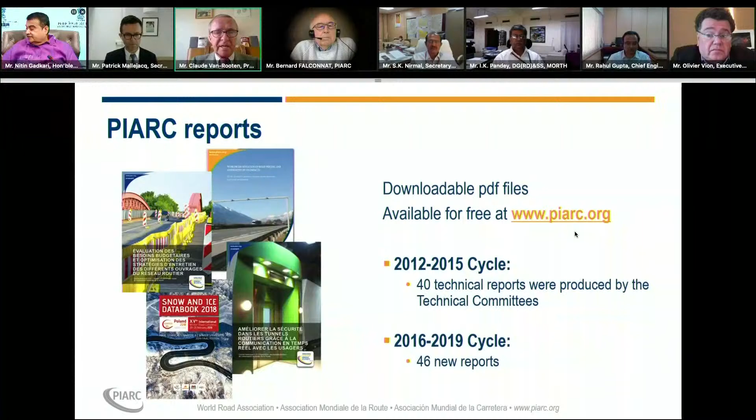It's important to exchange and present knowledge to countries who want more. That's why exchange of knowledge with and in low and middle income countries is quite important. We organized 22 seminars and 22 workshops in the former cycle. We have that all online on the website too. Now we have some difficulties organizing them all in person, but webinars are a fantastic solution to continue our knowledge exchange.

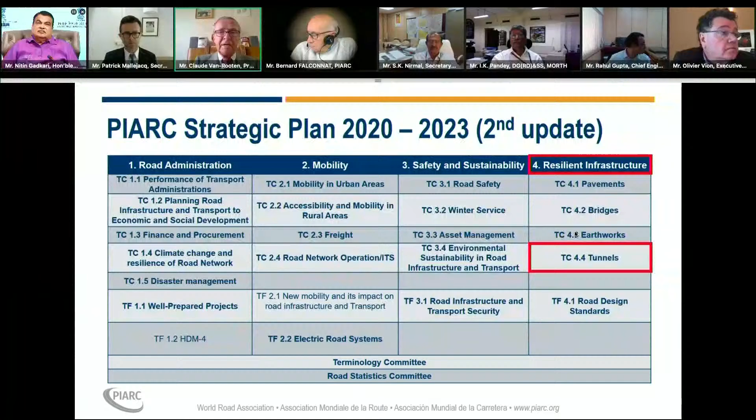We work based on a strategic plan after consultation of all our members and also partner organizations, because we try to have our work focused on the most important topics for the whole world. You see in the fourth column the topic of today: tunnels.

Within that strategic plan, we have horizontal issues: climate change, resilience, road safety, innovation, and since one year, of course, the pandemic. This is an issue where we have a response team quickly set up under the leadership of Patrick Mallejacq, working very hard on that.

Our work is led by Ingo Kaudinya about tunnel operation.

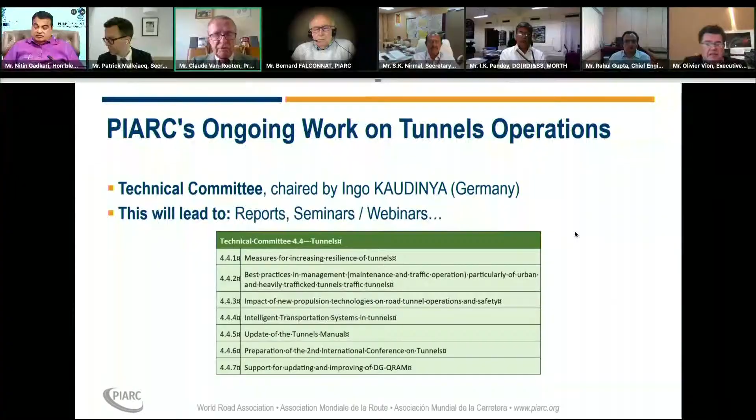Now I'm talking about the ongoing work on tunnel operations led by Ingo Kaudinya, who you are going to hear in the next sessions.

Tunnels: the technical committee has 130 members from 40 countries. Not every country is a specialist in all the technical committees we have set up. The work is organized in committee meetings and 7 working groups and task forces, and I would like to thank them all for their tremendous, continuous work on that.

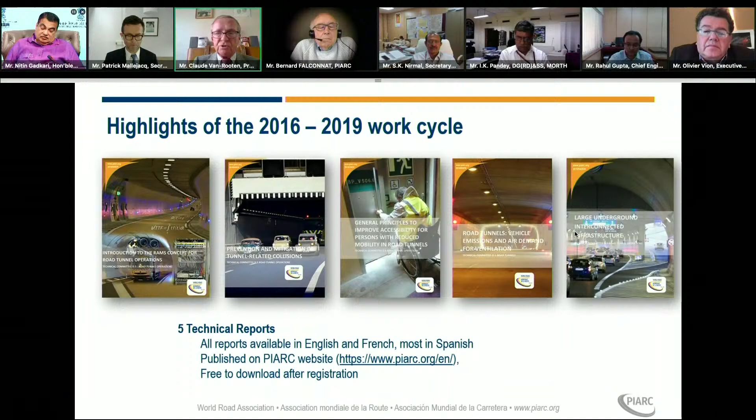Highlights of the last cycle. You can find all those reports again on our website, but it's important that you know it is almost continuous work.

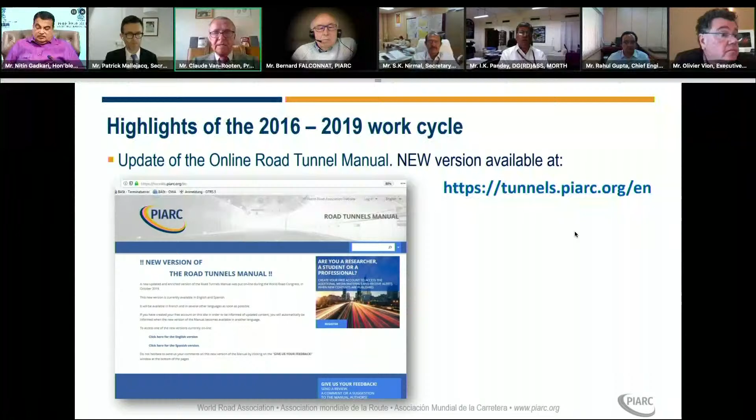Important also is the update on the online road tunnel manual. The new version is available on the website too. That online manual is a new method of presenting our work that is very accessible and helps you go at your own timing and speed to get all the information about what is happening in the whole world. I am being concise to respect the timing, of course.

We will have a second PIARC International Conference on Road, Tunnel, Operations and Safety in Granada in October 2022. And don't miss, of course, what we hope will be a real Congress in Prague in October 2023.

India was a founding member of PIARC in 1909. We have an esteemed member from India in our task forces on road design standards, and also on the Road Tunnels Committee. India is very welcome to appoint more experts in PIARC technical committees, to propose to host PIARC seminars locally, as you do now, and so on.

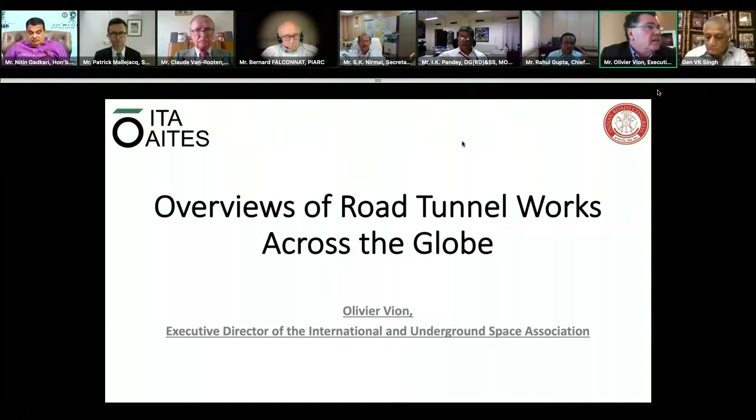The figures I will show you come from altogether 4,200 projects. Among them, 1,615 projects were in construction in 2019, and 2,600 projects were in planning or study phase. The global output for tunnel and underground space construction for the year 2019 was 125 billion euros, compared to 86 billion in 2016. That means growth of around 7 to 9% per year, which is twice more than global construction. So it's very important to show that tunneling is booming and that there are many projects all over the world.

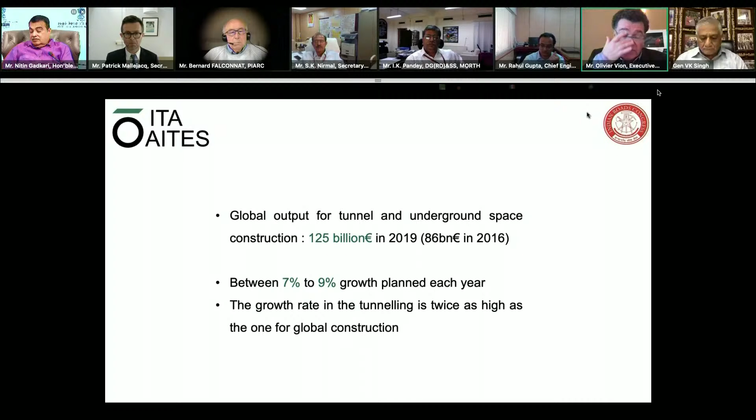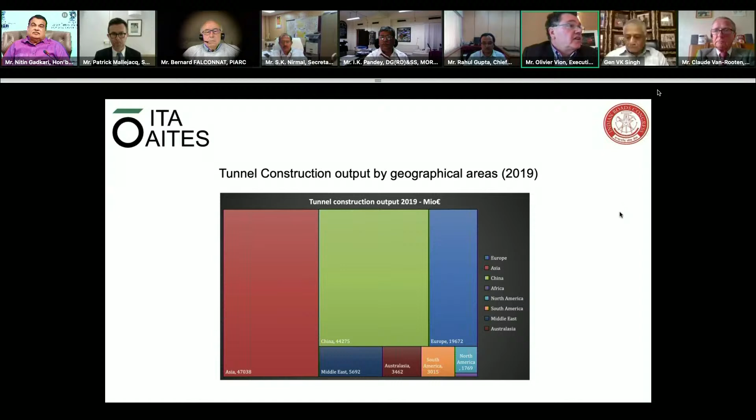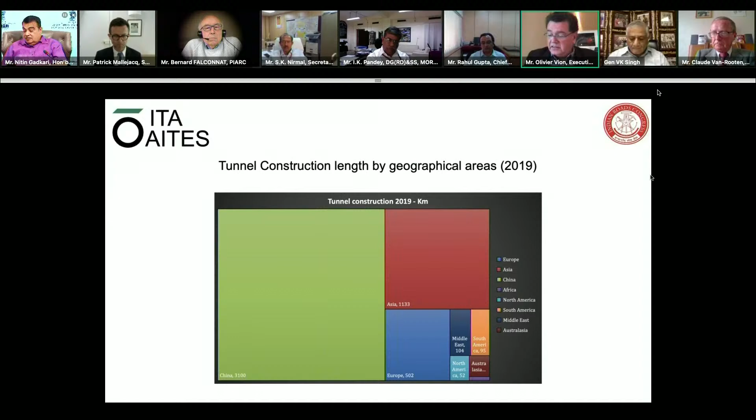Then in terms of kilometers, China is really the biggest. Of the 5,100 kilometers of tunnels that were in construction in 2019, 3,000 kilometers were being built in China, 1,000 in the rest of Asia, and 500 kilometers in Europe. This is very important to see.

In Europe, for instance, you have Turkey, which is now the biggest market in Europe, followed by some countries with the same amount of tunnels, around 40 to 50 kilometers excavated every year: Austria, Germany, Italy, Norway. Of course, the figures are different in kilometers versus output, because not all tunnels are the same value. Road tunnels are generally cheaper per kilometer than metro tunnels, and therefore countries building more road tunnels might be first in kilometers, but not first in output.

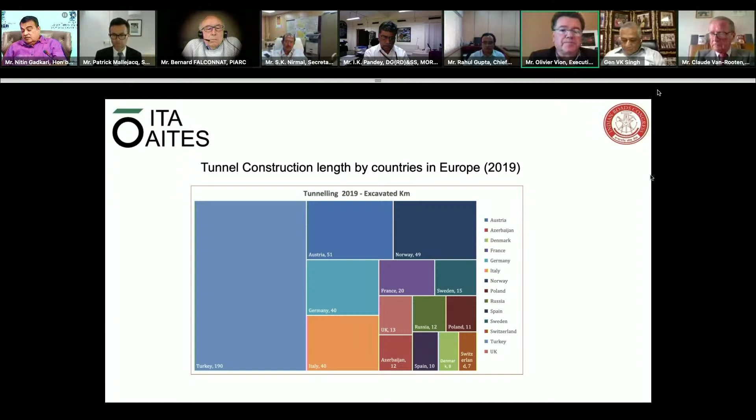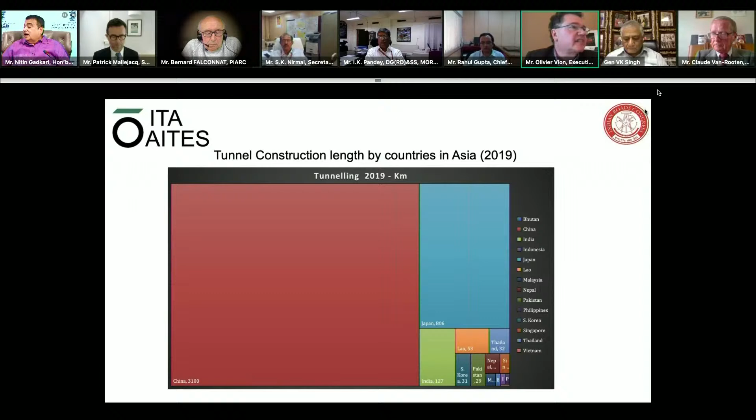If I take Asia, in kilometers you've got China with 3,000 kilometers of tunnels, Japan with 800 kilometers, India with 130 kilometers, and then other countries of Asia, in kilometers of tunnels excavated during the year 2019. As you see in the breakdown by use of tunnel, between metro, rail, road, and others, road tunnels are the majority of the tunnels being built in the world.

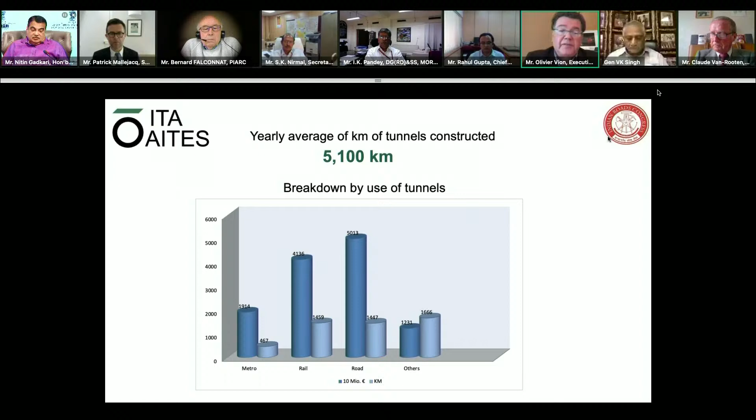If I go now more deeply on the road tunnels, taking the same thing: China, Asia, Europe are first, with 800 kilometers of road tunnel in China, 350 in Asia, and 225 in Europe.

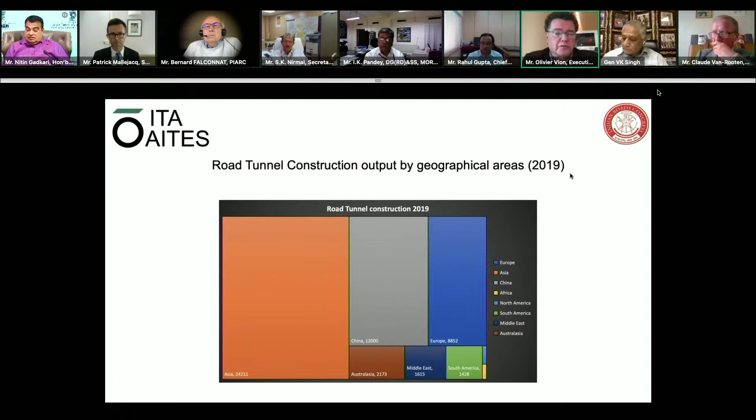And by output, Asia with 24 billion, then China, Europe, Australasia. So the global market of road tunnels, or all tunnels, is dominated by China and Asia, which are growing countries with the most people demographically, meaning the needs for tunnels and infrastructure are the most important here, and that's good. They need to build infrastructure, and among the infrastructure being built, tunnels represent a great majority of projects.

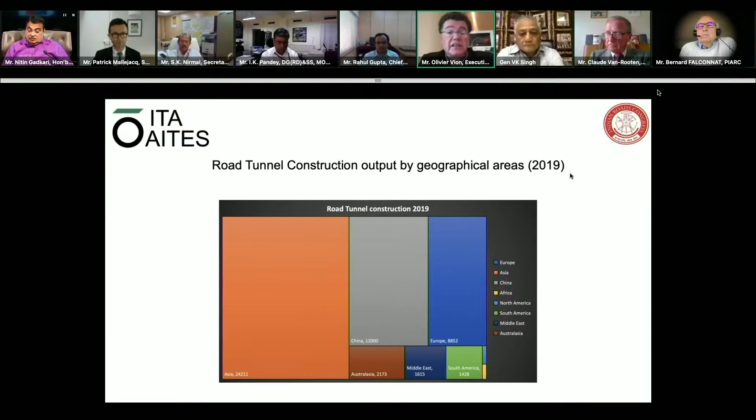That was a view of the reality of the year 2019.

If we look now at the projects, meaning tunnels in planning or study, it's more or less the same, even though the time frame between the start of planning a tunnel and its completion is much longer in Europe than in other countries, specifically China. Sometimes when you ask Chinese authorities about their plans, they can give you plans for the next 3 years, which already represents a big amount, but they do not have longer term plans.

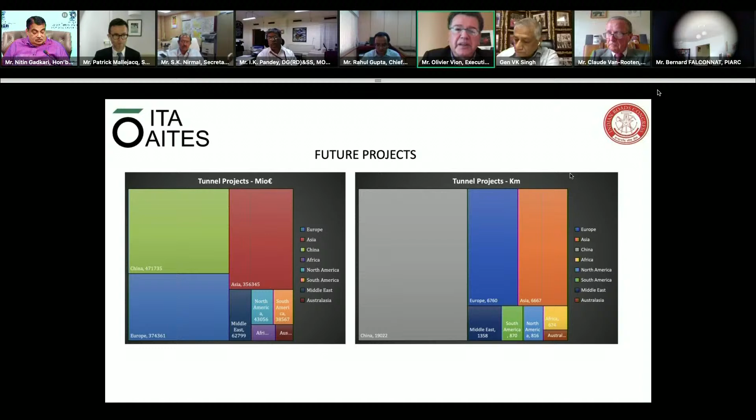For us in Europe, we have tunnels that have been in the planning phase for the last 25 years, and for which construction has not started yet. So we have many tunnels in planning, but that doesn't mean they will come in the next 5 years. In Asian countries, specifically China, when a tunnel is in the planning phase, it means that in the next 5 years it will be completed and commissioned. We would sometimes love to have this in Europe, but we have many other things to cope with, which unfortunately doesn't bring us to this figure.

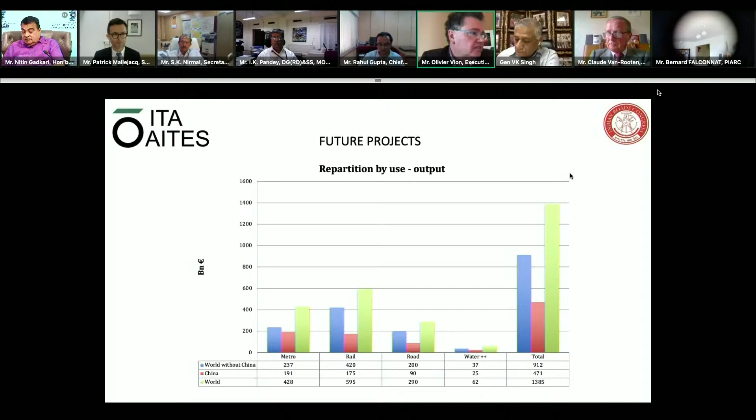I've tried to take some examples of road tunnel projects from the last years. The International Tunneling and Underground Space Association organizes awards every year for major projects and innovative projects - we'll start the 7th edition this year. I've picked some of the road tunnels that have been presented, either as winners or finalists of these awards, to show a variety of road tunnels being built around the world.

No, sorry, I already spoke about this. The first one is in Norway.

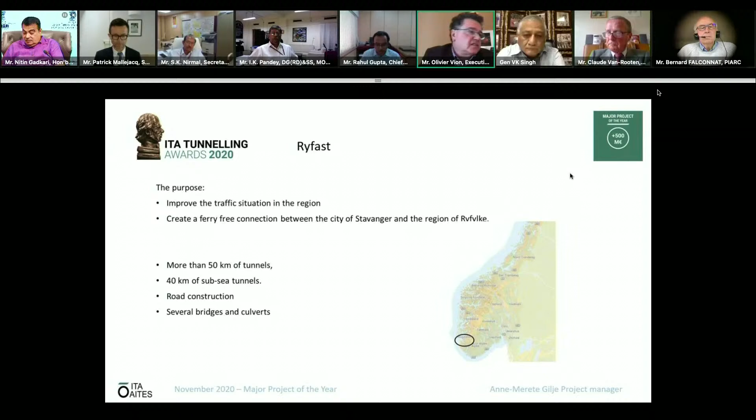As you know, the coast of Norway has a lot of fjords, but in the past you could only cross by ferry. They decided to build tunnels under the fjords, creating fixed links all along the coast. One of the big projects was the Ryfast tunnel, linking the city of Stavanger to the region of Ryfylke, with more than 50 kilometers of tunnels, including 40 kilometers of subsea tunnels.

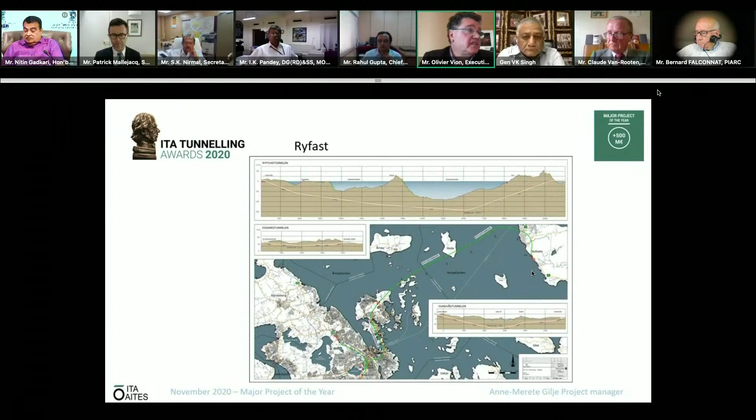It was built by drill and blast with probe drilling, and of course advanced drilling, because survey drillings made from boats, from the surface, are much more difficult to operate than when you're on land. So you need really advanced probe drilling and pre-grouting. Of course, you have something like 50-60 meters of water above, so you need to be sure you won't have leakage - otherwise it's very difficult to cope with.

Rock support with a geologist on site, shotcrete, bolts, reinforced ribs, fore-poling - all along 40 kilometers of tunnels. Quite an impressive tunnel in Norway.

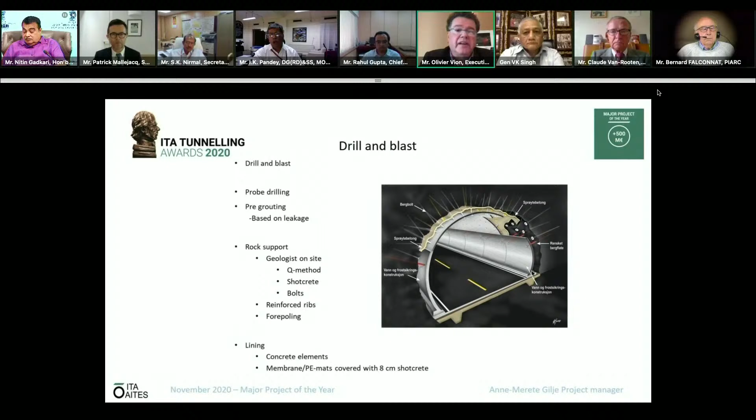Also in terms of operating the tunnel, to break the monotony, they made large caverns, sometimes bigger tunnels with changes of colors, so that people don't fall asleep when driving in a 40-kilometer long tunnel under the sea.

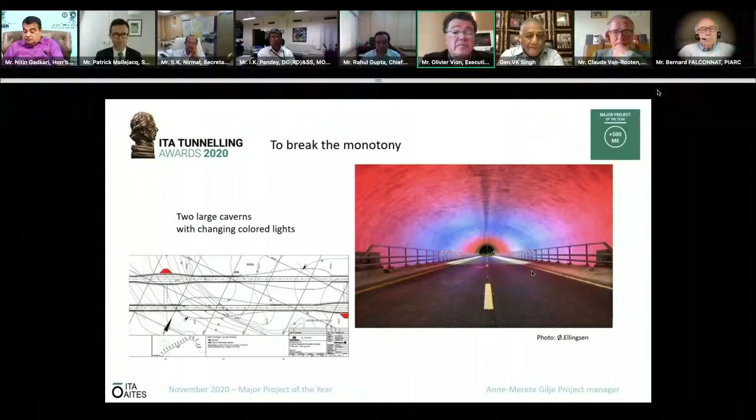So all the challenges along the way were, as I said, the weak zones, the low overburden, bad water leakage, and they had also difficulties not under the water but on other parts of the tunnels, and of course environmental issues and local authorities in order to be able to build such a tunnel.

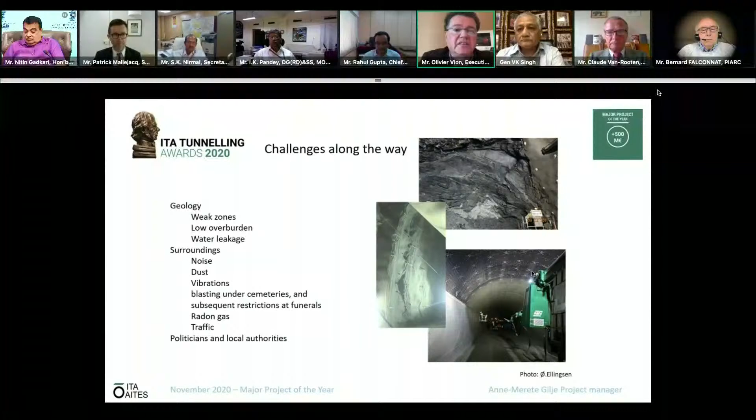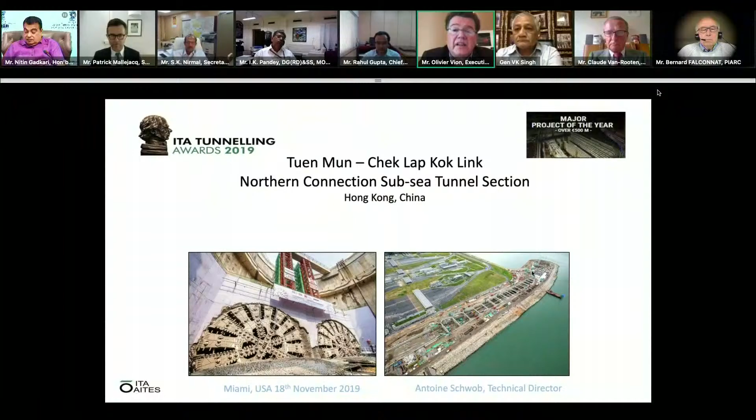Here I'm going closer to you in India. I'm going to Hong Kong, which is the Tuen Mun Chek Lap Kok Link tunnel, which is also an undersea tunnel, but this one is being built by TBM. It's nearly a 5-kilometer tunnel, 2 tubes with a depth of 60 meters, and some cut and cover for the ramp, and 57 cross passages between the 2 tubes, 46 of them being built by tunneling methods.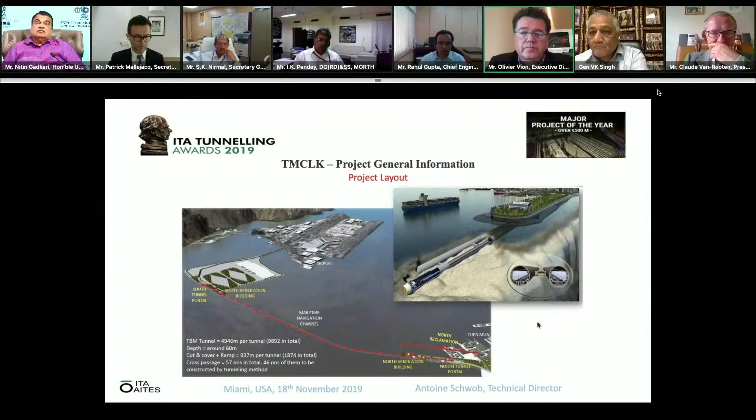It's what has been an Herrenknecht TBM, a slurry mixed shield TBM, 17.63 meters in diameter. So it's one of the biggest TBMs ever built, with a design pressure up to 7 bars. That's something impressive.

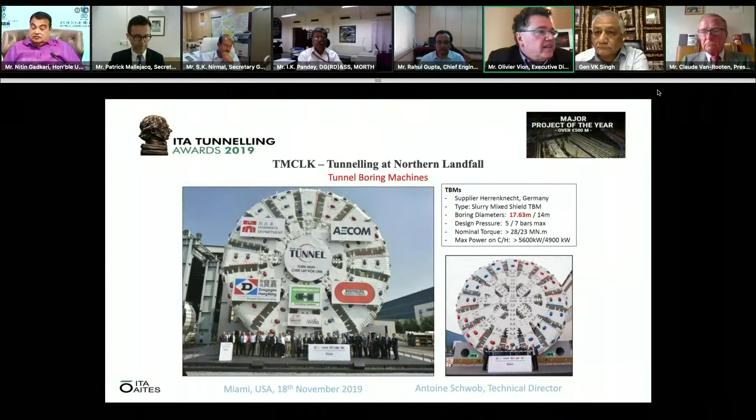Also, this shows that we are now able, in terms of construction - I would not say that we are able to build any kind of tunnel, because, as I said, the easy tunnels have all been built. Now we have to cope with tunnels that are difficult to build, that need always more innovation, more research and development.

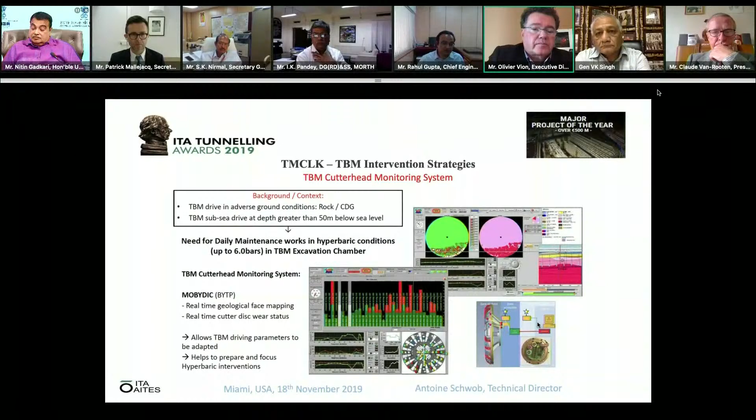One of the specificities of this tunnel was the fact that when you are building such tunnels with TBMs, you need to be able to change tools on your TBM, and you are, as I said, at something like up to 6 bars, so you are in hyperbaric conditions. That's been one of the main issues for this project: how the people could be able to go and repair frequently the tools in hyperbaric conditions up to 6 bars.

So meaning that they were not going from normal atmosphere to 6 bars each time they were going there. They were staying at 6 bars atmosphere all the time, with long cycles, up to 28 days. So they had built a specified habitat with pressurized living chambers on surface, in order to have people staying at this 6 bars atmosphere.

And of course they had to involve doctors, nurses, support technicians, just for the work of changing tools and doing operations in the hyperbaric of a TBM. You have 6 doctors, 3 nurses, 45 professional hyperbaric workers, 12 life support technicians, and 3 hyperbaric operation supervisors.

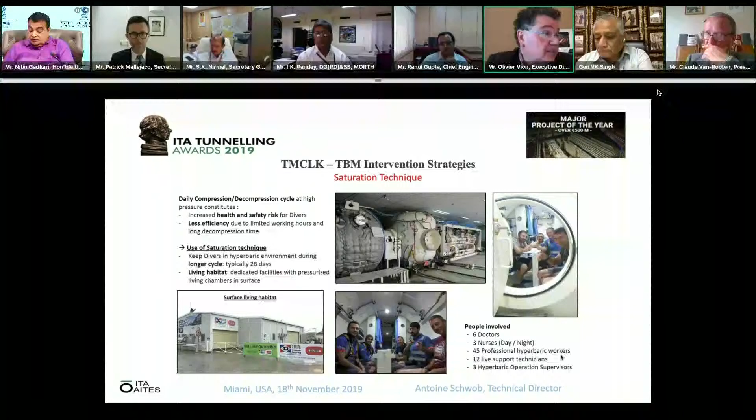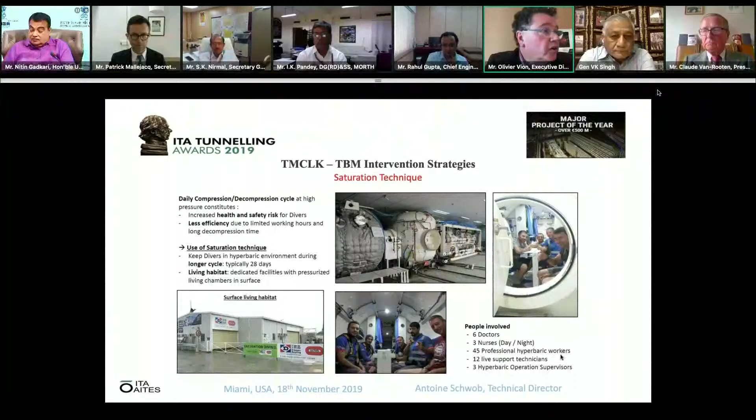But in terms of efficiency, keeping everybody in the hyperbaric environment means less risk, because the risk is always in the decompression. So if you have less rhythm of decompression, it's much better for everybody. But you have to organize all your life specifically for all these people living during a longer period in hyperbaric conditions.

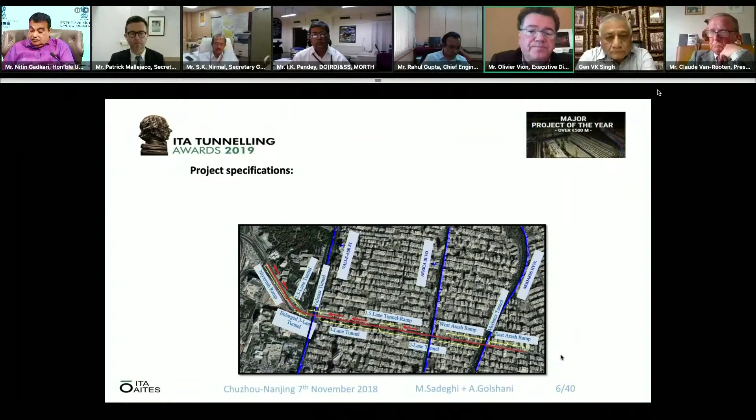Another interesting tunnel is a tunnel in Tehran. It's a shorter tunnel, but in a very dense urban area, underpassing vertical arteries, with 3 emergency exits, and also multiple cross sections.

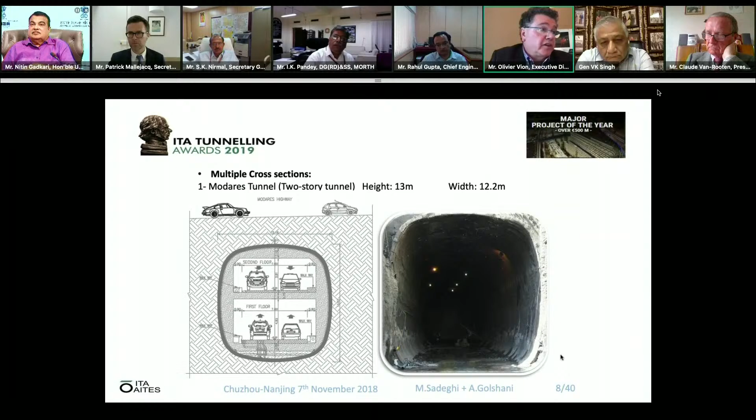It is very impressive on this tunnel. So you have, in fact, a cross section which is a 2-story tunnel, and more or less a square tunnel, 13 meters high by 12.2 meters wide, with 2 lanes in one direction on top and 2 lanes in the other direction below. But you also have a normal 2 traffic lane tunnel - for the same, all this is the same tunnel, just different parts of it.

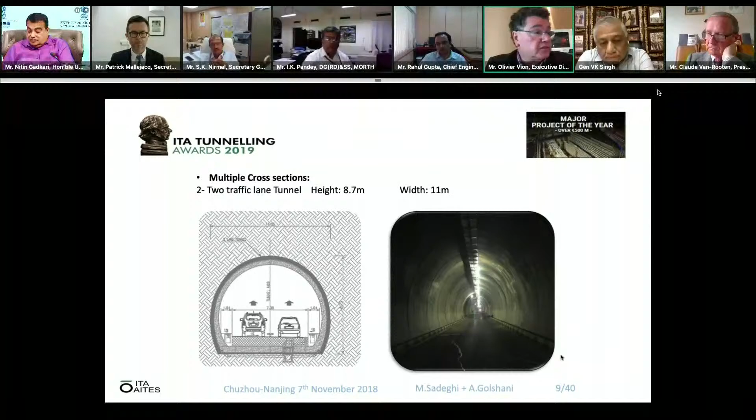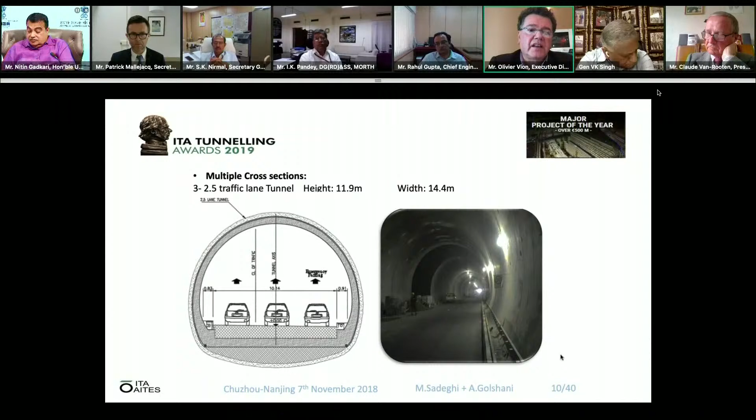You have one section with what they call 2.5 traffic lanes, meaning you have one lane which can be used as a traffic lane or not, depending on the moment. And you have one with 1.5 traffic lanes. So the issue, of course, in this operation is to go from one section to the other, and this is quite impressive to build under a very dense area.

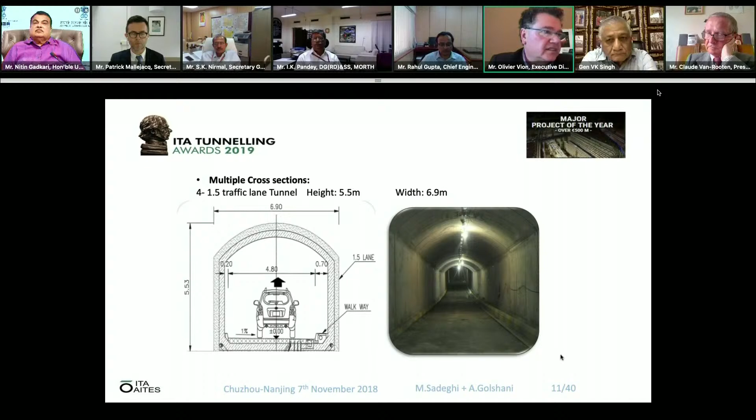But it is something which is needed, because in cities - and I will not tell you about India, where you have very dense areas - for transport it is very important to use the underground to build tunnels for roads. Here we're talking about road tunnels, but of course also for public transport, it is very important to use the underground space and to be adaptive, so that sometimes you don't need 3 lanes on the whole length of your tunnel. You can modify your tunnel's cross section depending on where you are.

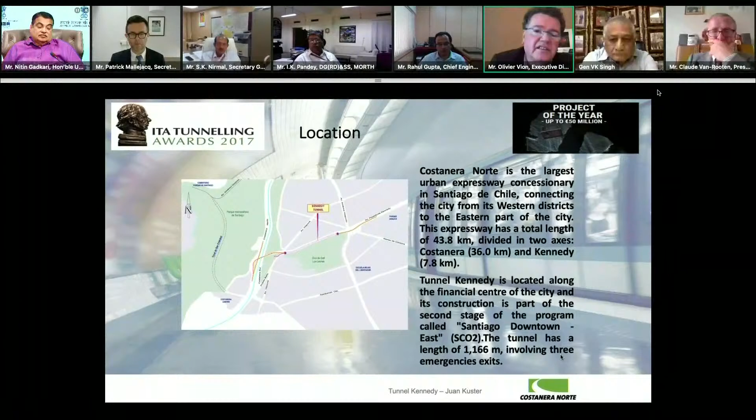And the last example I took is in Chile, which is the Costanera Norte with the tunnel Kennedy. It's a 1 kilometer tunnel in Santiago, with also typical cross sections up to 4 or 5 lanes. So on 50 meters you have 5 lanes.

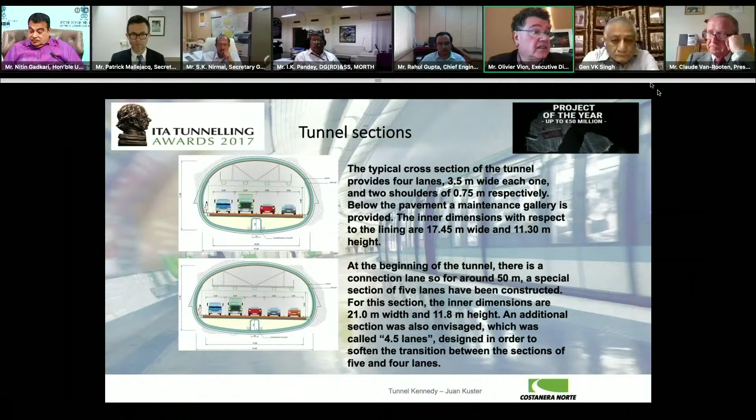That means you have a section which is 21 meters wide and 12 meters high, and it's also a 4.5 lanes design, in order to be able to have this tunnel with a very dense traffic, because 4 lanes are needed in each direction.

And as you see, that has been built, of course, with conventional methods, but it is very important because a 21 meter wide tunnel is huge, and 12 meters is a huge section. So it's nearly 300 square meters section in some parts. So it's very important to be able to build that safely.

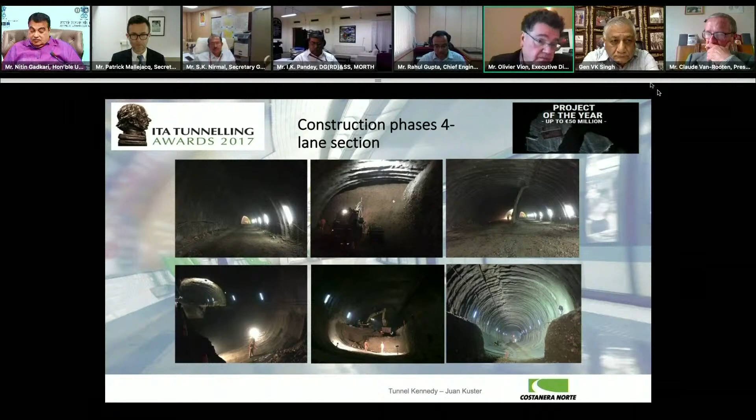And it's, of course, been made with different sections with vault and then the invert and so on, with the tunnel lining and the waterproofing. So that was my overview of road tunnels over the world.

Of course, I am happy to answer questions from the floor, or from everywhere it could come from on this. And once again, I thank everybody for having invited me to make this presentation.